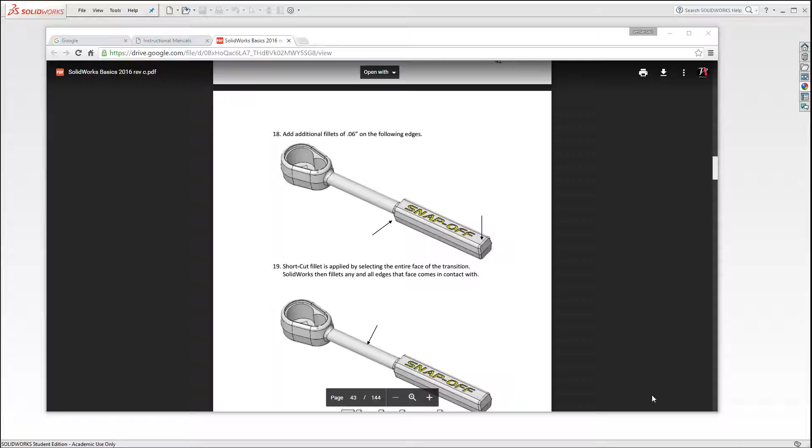In this exercise, we're going to take a look at the functionality inside SolidWorks 2016 with regards to creating this ratchet body that you see here. So let's begin.

First of all, we're going to build the head of the ratchet, then the transition section, and finally the handle. I'm going to start off with a new part file.

I'm in IPS, for inch pound second. Also note at the bottom, if you ever need to change the units, you can change it right here, and edit document units brings you there automatically. Very similar to just going up to tools, options, and setting what you need there.

Okay, I'm going to go ahead and select the front plane and start a sketch. I'm going to take the center line tool, hit the little arrow to the right of the line tool, find center line, and lock into the origin. When you get the orange dot, click and drag out a vertical line about an inch and a half or 2 inches, and then hit escape.

Now take the line tool and glide up just to the left of the origin. Take careful note where my pointer is currently, right about there. Click and drag like a 1-inch line at a slight angle to the upper left, as you see what I have. Click and then hit escape.

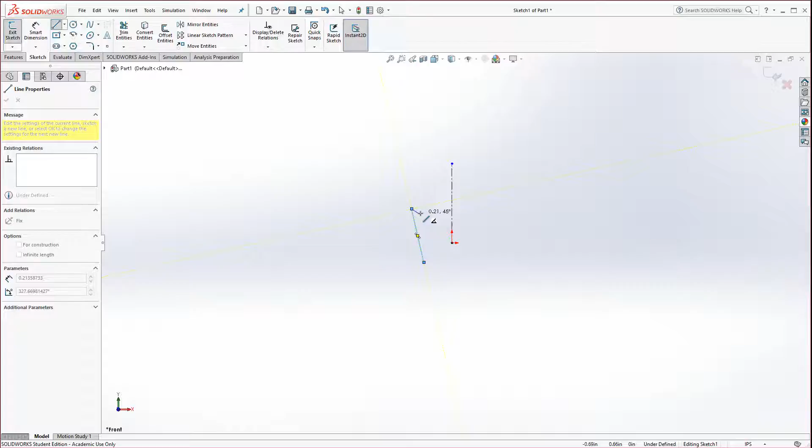Now we're going to look at the mirror tool. There's a couple things you could do with mirror entities. You could actually just click and drag a fence to surround both entities. In this case, there's only one center line, so it makes it very easy for SolidWorks to just go ahead and mirror this. And you can see it mirrored it over.

Now, rather than what some strategies are with new users, where they draw circles as an example - what not to do is where people draw circles like this, and then they go ahead and draw the lines and trim, and that's just a lot of work. Don't bother doing it that way. Here you could draw this without even using the trim tool in most cases.

So over here in the upper left, we go to the arc tools, hit the little arrow to the right of the arc tools, and you're looking for tangent arc. Tangent arc automatically makes a tangent off of one point. Go ahead and click and drag it over the top and drag it to the other point.

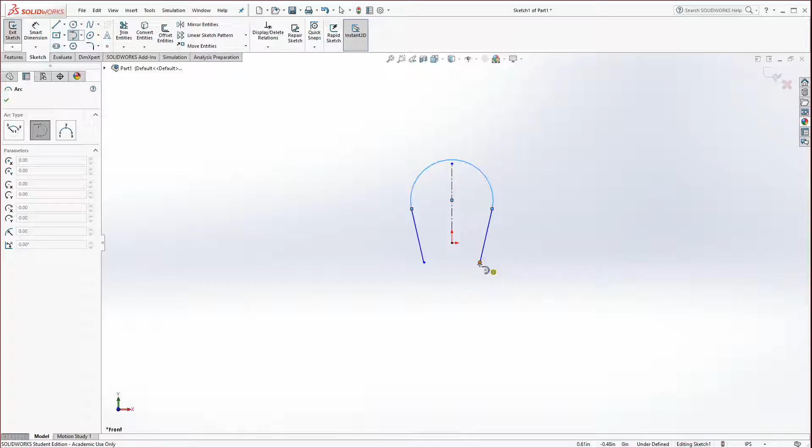Click. Go ahead and do the same here. Click on the bottom vertex, drag it to the other one, and kind of loop around versus go straight across, because sometimes that might transition to a different type of arc. But there we have our arc.

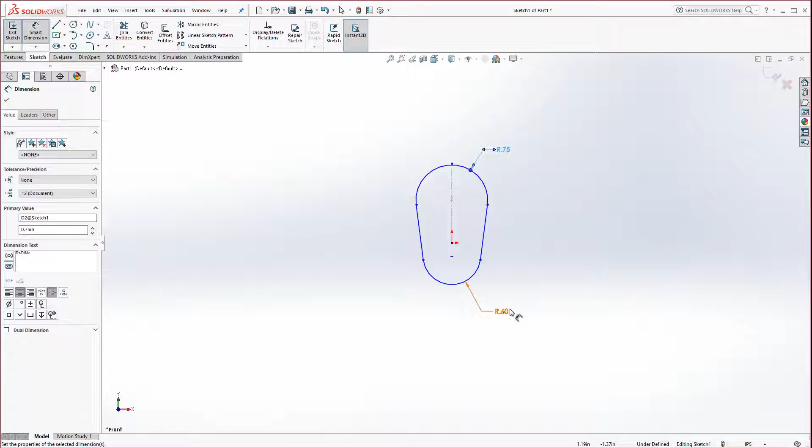Now we could go to the Smart Dimension tool and select the arc and dimension the bottom at 0.6 and the top at 0.75. Now you might notice that I'm at 2 decimal places. This is where we could use our IPS button and edit document units, and then specify 3 decimal places and hit OK.

All right, I'm going to go ahead and put one more dimension in. I'm going to dimension between the centers of the arcs. Now, sometimes it's difficult to see the centers if you're not looking carefully, so it's easier to select the arc itself - click on this arc at the bottom, click on this arc at the top. It automatically defaults to the centers.

Move your pointer to the right and center the dimension, and just make that 0.75. Now you could hit escape on your keyboard, and you'll notice that this center point is floating. It's not attached to the origin, and that's what we want to attach.

So there's a couple things you could do. First of all, you might want to zoom up - you could scroll and zoom up to it, or hit the F key for zoom to fit. Then to get this, if it's overlapping the line, it's drawn way up here - grab this bottom arc and, with the left mouse button depressed, drag it down and up, and you'll see it will move freely.

Then once it's moved away, you could go ahead and grab that center point and drag it far and away. Note that if it's really close to the origin and you try to drag it, it doesn't move. Again, the technology really wants you to drag it far distances and drag it back - it'll snap a little bit easier than it normally would. Okay, you'll see it becomes fully defined.

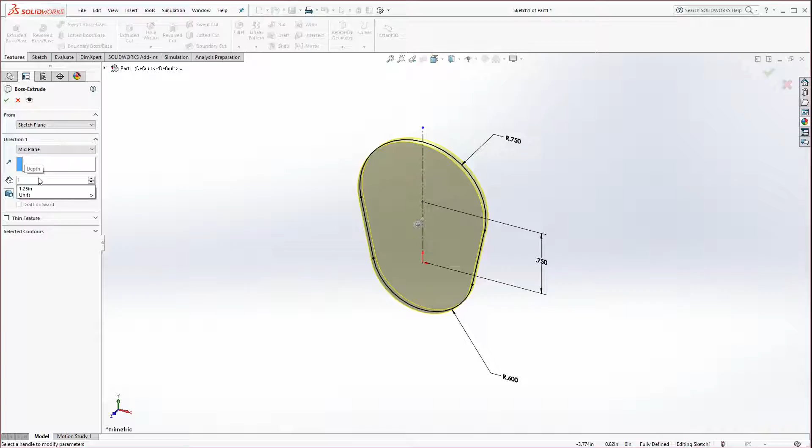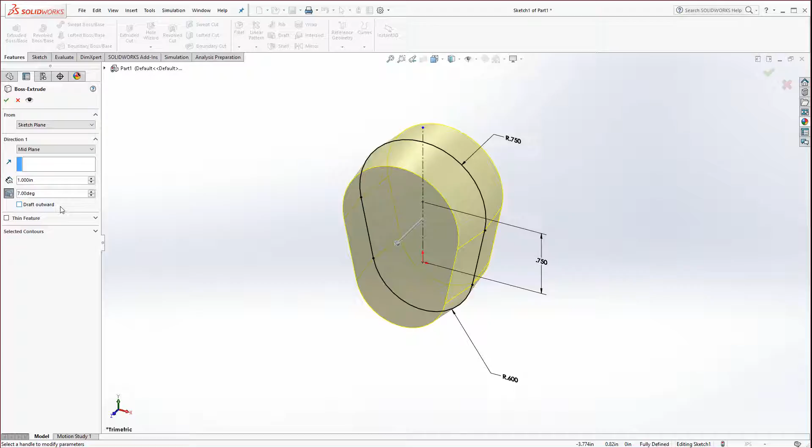Don't forget to click on the draft on/off button on the left. Click on that and set it to 7 degrees. Note there is a draft outward switch. I don't want you to use that right now, because if you set that, look at what you get—you don't want that. Make sure draft outward is disabled; it should not be checked. Hit the green check mark.

Let's put a recess in here for a cover plate. Select this face and start a sketch. You can do this in isometric view, or if you prefer, hit your space bar and go normal. While this face is selected, let's use the Offset Entities tool.

This is a tool we have not yet used through the other chapters, so it's a very good tool to learn. Offset Entities selects the edges of the geometry you've selected, like in this case the faces, but you can select edges or other sketches too, to offset them.

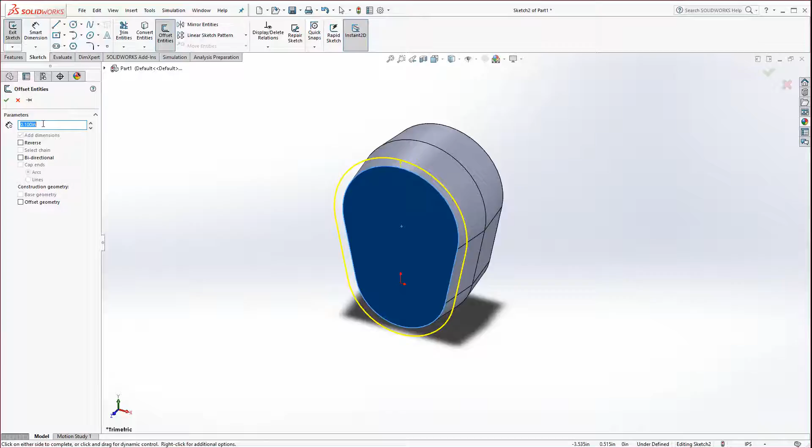Here you see a preview, offsetting outward. It actually needs to be offset by 0.125. Then check the reverse box—make sure there's a check in there. Sometimes you click on it and it just activates the box; the second click actually stays and checks it in.

Hit the green check mark. You can see this dimension of 0.125. If you double click on it, you could change it if you wanted to—it always remains there. Now we just go to Features, Extruded Cut.

Make sure you select Extruded Cut to remove the material—do not select Extruded Boss Base. Extruded Cut: put in 0.125 for the recess and hit the green check mark. We will not be adding draft on this, as it's a machine feature technically.

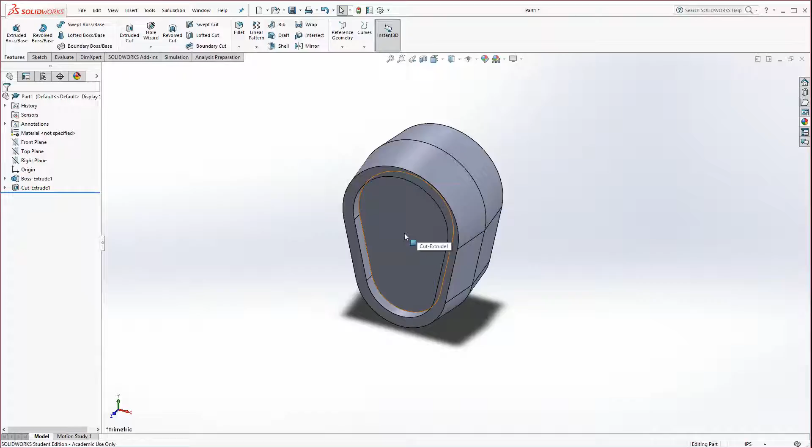Now we could go ahead and select the floor of that recess. Select this face and start a sketch. This one might be easier done if we hit the space bar and click on the front face, or click on front, or normal to—any of the above.

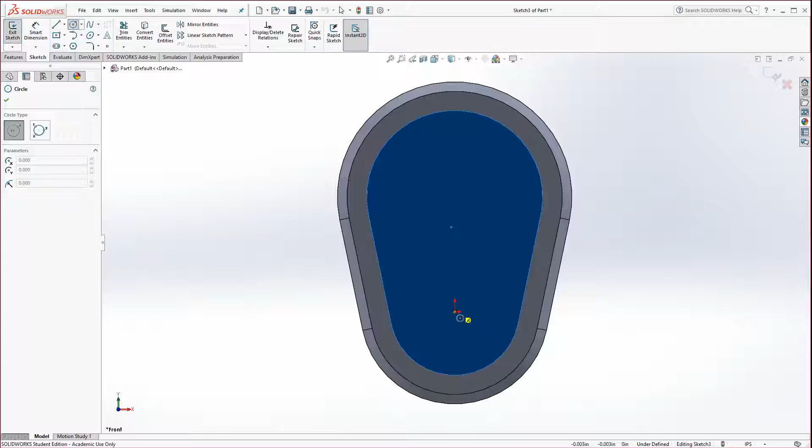Let's go to the circle tool. From the origin, it's very easy to find the center of this arc. Draw out an arc about 0.3, maybe 0.325-ish, around there.

Now for this one, it's not so easy to find the center, so here's a little trick: move the pointer to the edge of the arc where you want to find the center. This works every time. Once it highlights—I haven't clicked yet, be aware I did not click—you'll see the center point wake up, and now you can just move your pointer over there and click and drag out your circle.

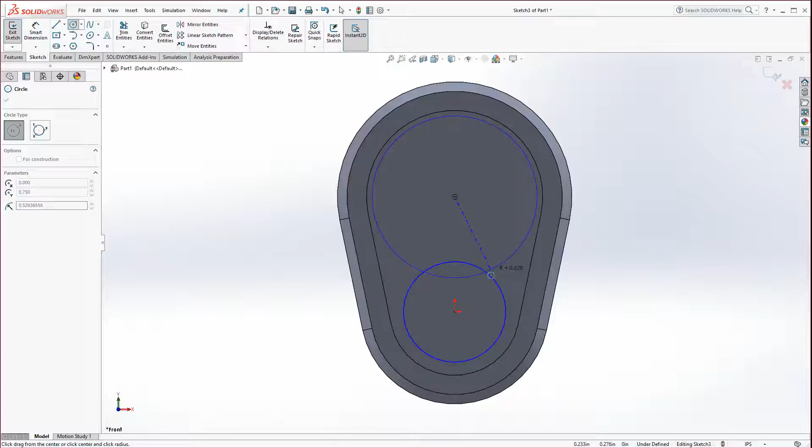Intersect the two—don't get them tangent to each other like this, you don't want that. Intersect them so they're just slightly intersecting, like that, so you get the little football shape in between.

Now let's go ahead and go to Trim Entities. There are several different types of trim; in this case, power trim or trim to closest. Let's try trim to closest first—just click on what you don't want. In this case, that bottom part of the little football shape, the area in there—click on it.

You'll see it disappears. If you want, try a power trim—it's a little different. You just move your pointer through the region you want to erase, kind of like you're erasing with a dry eraser, clicking and dragging through where the eraser would path, and it removes that geometry in between.

I'm going to lighten my screen up a little bit. If I hit this little arrow, you'll see there are different types of floors and things like that—plain white brightens it up, easier to see. Hit the green check mark in the upper left.

Okay, now from here I could go to Smart Dimension and put the dimensions in. Now in this case, I'm getting a radial dimension. As you might remember from earlier exercises, SolidWorks, if it doesn't detect a full circle, gives you a radius. So if you want to convert that, because that's important, especially if it's going to go out in the shop and be machined, so they can pick the proper size reamer. They might be working very quickly, so you might want to give them a diameter solution instead.

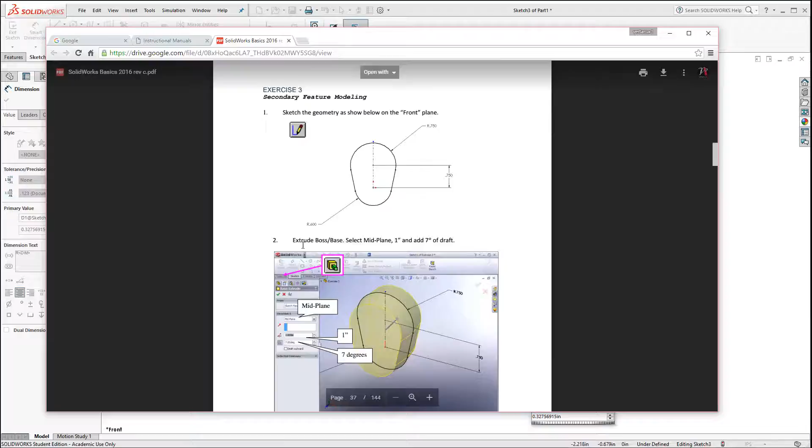So what you have the ability to do here is, in this case, you can see it's 0.35 and 0.5. Let me first change this to 0.35, and then I'll dimension this at 0.5, and then I'll show you what you could do. When they're selected like this, you could go over to Leaders, and right here you have diameter. Try that with the 0.35. Click on that.

Okay, and I'm going to hit escape. One click, it's actually in a mode where it's... there we go. I wanted to get the properties up there. You could either right click as well to do this. Here, there we go, go to Leaders and diameter. You could also right click, and there's options in there.

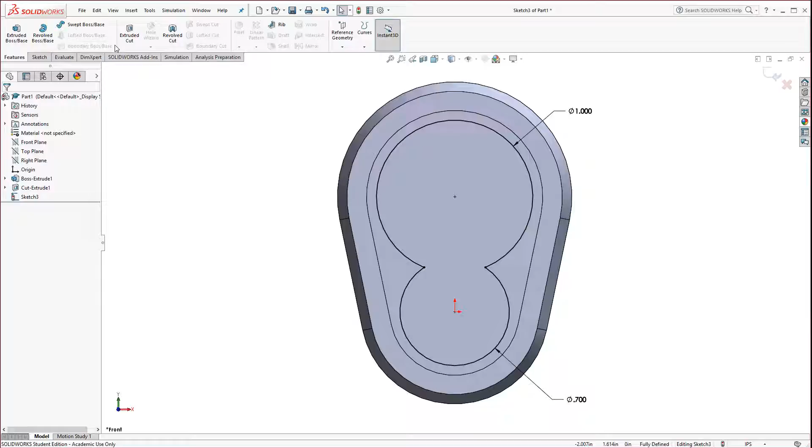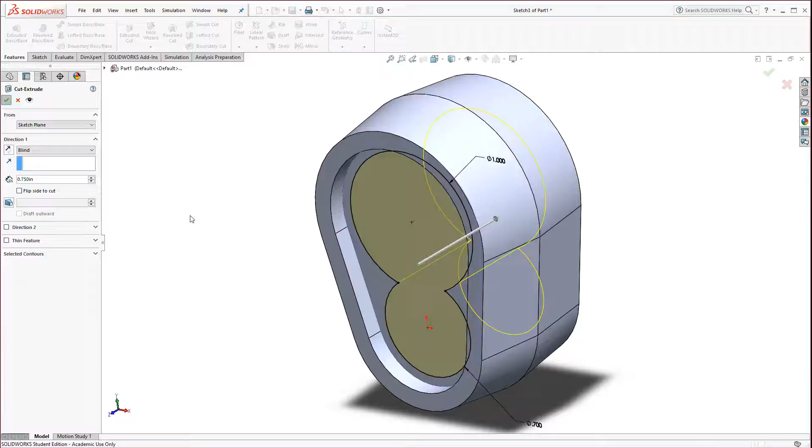Okay, so now go to Features and Extruded Cut, and we're going to cut this pocket. Let's take a look at the manual here, the depth of 0.75. So go ahead and type in 0.75 and hit the green check. Again, it's cut extrude. If you don't have it in cut extrude, cancel it, go to cut extrude. Otherwise, you're just going to build material on top of material.

It'll just... okay, let's go ahead and select the floor of that pocket and start a sketch. Again, normal to might be a good option, or click on the front plane after you hit the space bar. And let's put 2 circles in. Or we'll just put 1 in actually. Click and at the center, drag out your circle and dimension it. Okay, in this case, it's going to be, let me just check my... 0.375.

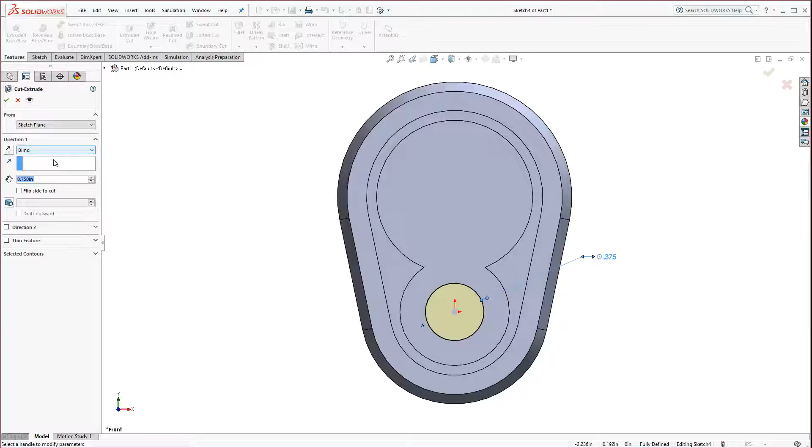Okay, now I'm going to go ahead and cut this. I'm going to go to Extrude Cut and select Through All. Okay, so now I have that there.

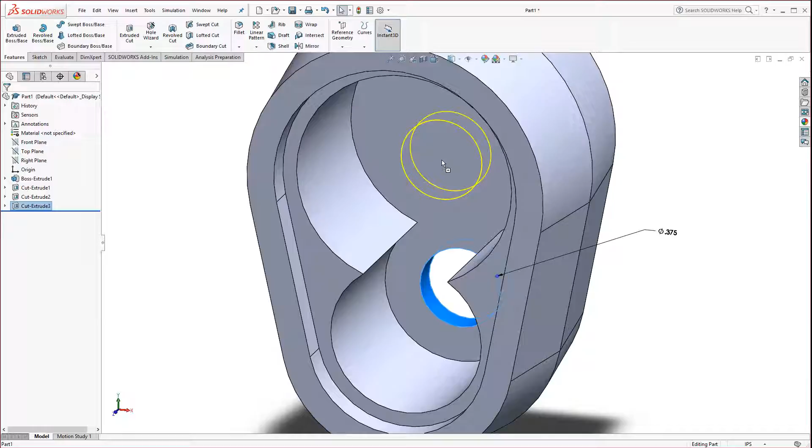Now what I can do, if I hold the Control key, I could drag off an additional copy. Actually, I'll do it from the feature tree here. I'm going to hold Control and drag this right onto that surface. So I'm holding Control and the left mouse button, both depressed at the same time. Control is the one you want to click on first and hold it, and then you could go ahead and drag it from the feature tree. Release the mouse button first, and then you can release Control.

And it's going to tell you there are external relations. Do you want to delete them or leave them dangling? The external relation it's referring to is most likely the center point that was locked into the center of the arc below. If you leave it dangling, you could reattach it. It gives you a little red block.

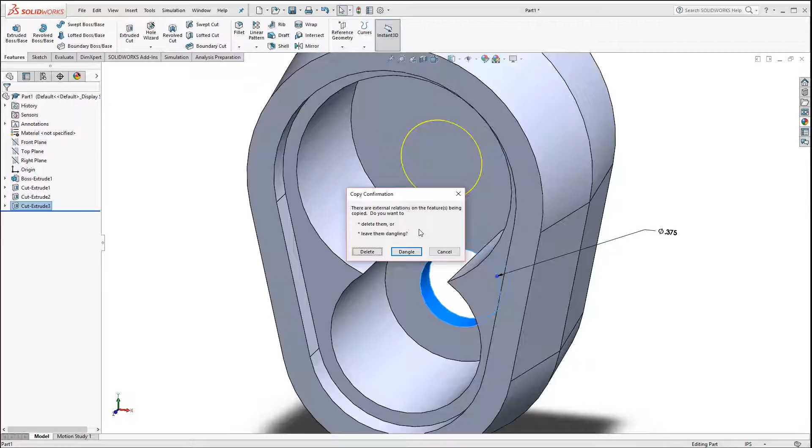I'm just going to hit delete, and then I want to show you how to edit that. So you can see clearly, as you rotate it, it's not centered. So what I want to do is right click on that cut extrude in the feature tree, that cut extrude 4, and you'll see edit sketch. Click on that. Now here you could grab the center with the left mouse button and drag it around. What you could do to wake that up again, just like we learned earlier, drag it to an edge. Don't release it yet, just wake up that center point. Now you could drag it back, release it, and hit the rebuild button at the top. Rebuild regenerates the model with the changes made.

And there it is. Okay, let's go ahead and put the fillets on. Go to the fillet tool and set it to 0.1, and select this edge and this edge. Hit the green check.

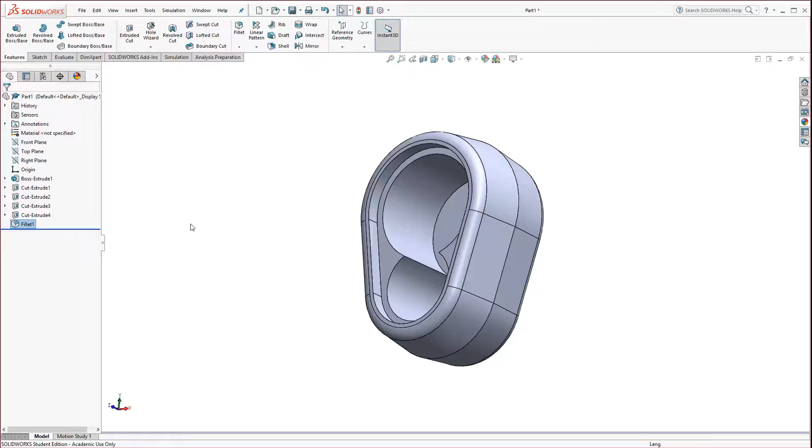Now what we're going to do is make the transition section. Go to the top plane and click once, but don't start a sketch. Instead, I'd like to show you how to offset a plane and make a new one off of it.

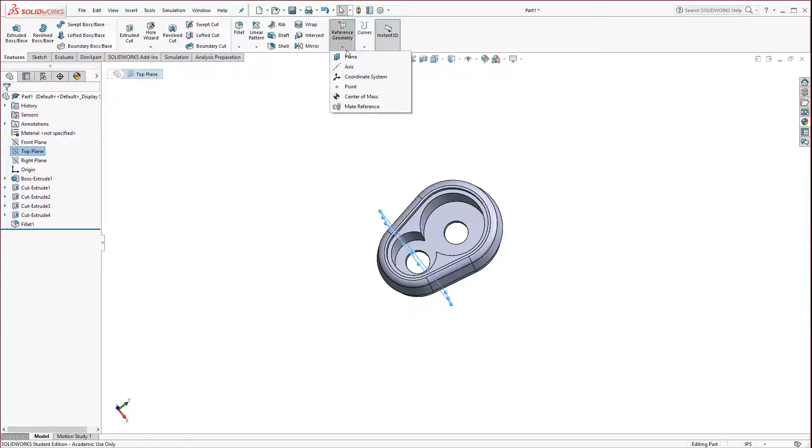The top plane is centered, and that's a great place to draw a sketch, but unfortunately it's in the center of the model. We want that offset the length of the transition section, which is 4 inches. With that selected, go to the reference geometry button, click the little arrow, and find plane. It'll take a minute, but then a little arrow and a plane will pop up.

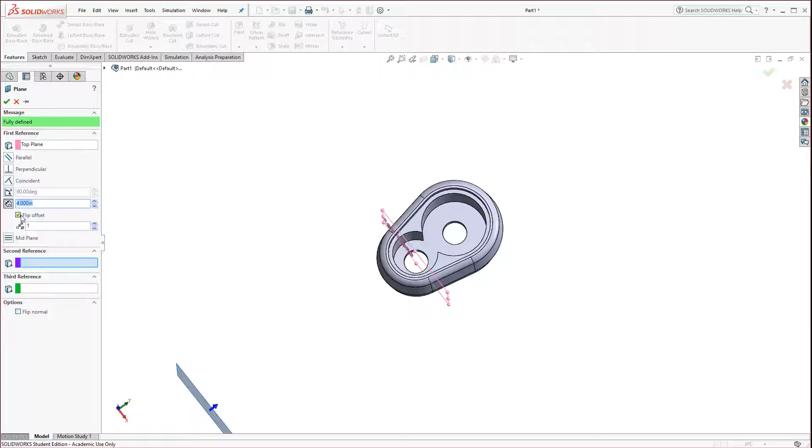Now you could either drag this, grab the little arrowhead and drag it - I'm having a little tough time getting that to work. That's okay, I'm going to type in 4 for 4 inches and flip the offset. Check the little box, flip offset, and if you zoom out you should be able to see it's down below. Hit the green check mark.

Now you can select that edge of that new plane you just created and start a sketch. You could draw an isometric if you want, maybe zoom up to it, or go normal to. Either one's fine. Click on circle, and at the origin - that origin is a projection of the original origin in the center of the model - so as long as you centered everything, you're in good shape.

Click and drag a circle out, and now just go to Smart Dimension and dimension that circle at a half inch, so 0.5.

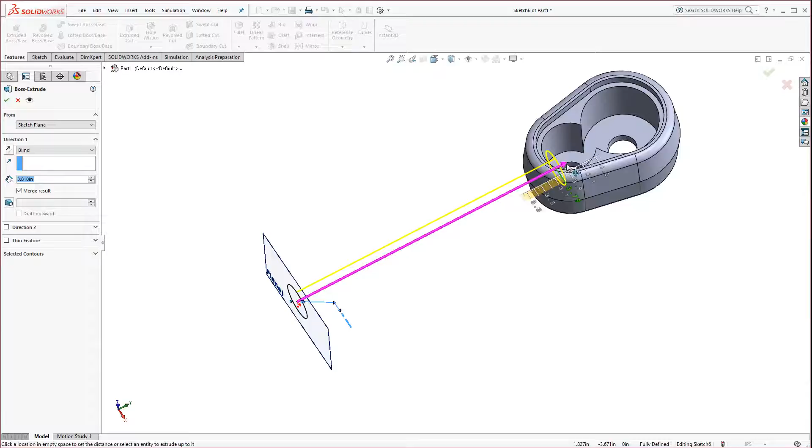Now we could go ahead and go to Features, Extruded Boss/Base. If we were to go in here, we might have a little bit of a tough time finding exactly where that stops without intersecting the model like we see here.

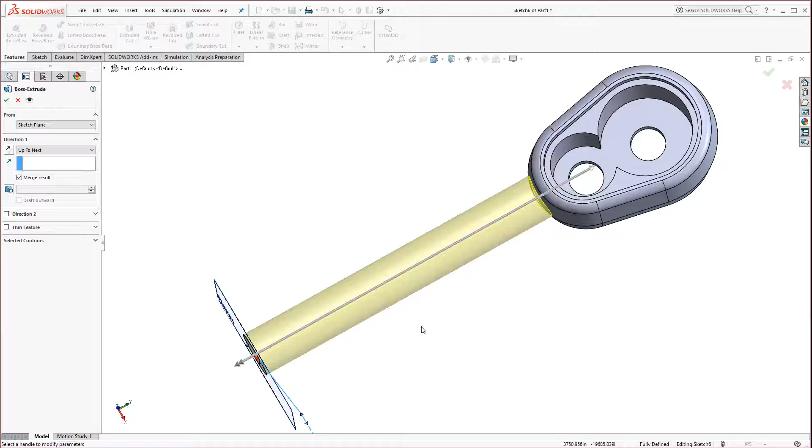Instead of just going with blind, try selecting up to next. Now if up to next isn't available, that typically means your extrusion's in the wrong direction. But if it's available, that means you're pretty good to go, and you could go ahead and select it. It will go up to the next body and intersect with it, combining the two. Go ahead and hit the green check mark.

Now you could hide that plane. Any plane you could hide or show, you just right click on it, and there's a little eyeball with a line through it. Click on that, and that will hide it.

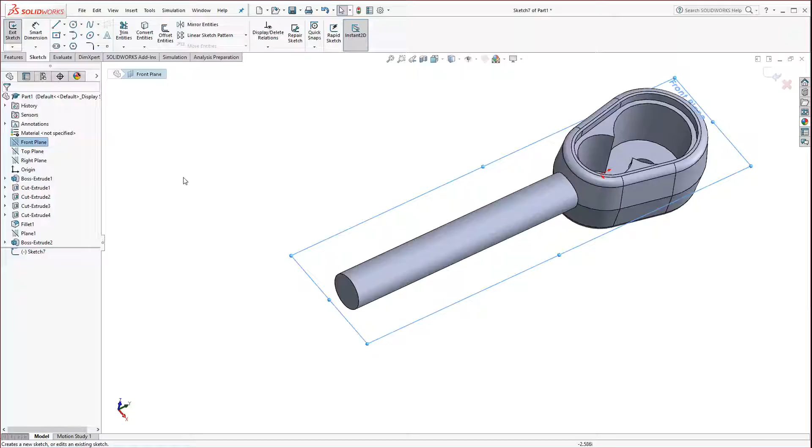Now select the front plane and start a sketch. Hit your space bar and go normal to the front, or you could go normal to. Either one is fine.

Now I'm going to zoom out a little bit because we need to make the handle section. On the handle section, I'm going to show you a little trick here. There's a dozen ways to do this - this is just one, it's a modeling technique.

Go to corner rectangle, and over here on the right, just drag out a rectangle. Don't worry too much about the size. Let's go ahead and add smart dimensions to it - don't select the points. Okay, it should be 4 inches by 1 inch.

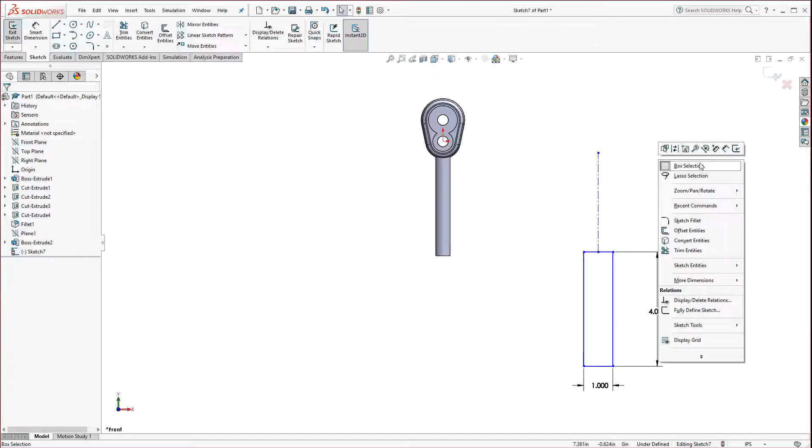Now go to the center line tool. Hit the little arrow to the right of line, find center line, lock into that middle, drag out a center line, hit escape. And if you right click, remember you could go to a quick launch of smart dimension, or you could go back to smart dimension up there.

Dimension this at 3.75. The reason why I'm making it 3.75 is because we're going to add draft on it. If you made it 4, it would be sitting on the outside and only a little sliver would be contacting that surface, intersecting the two. So we need to dig it in a little bit.

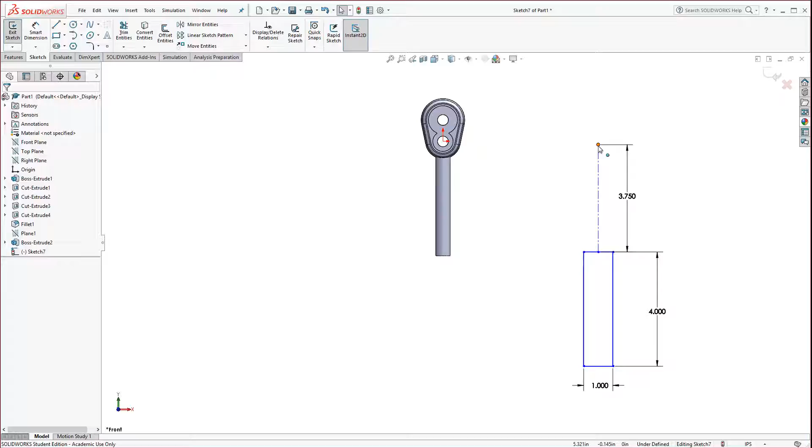Hit the green check mark, and now here's what you do. Hit escape a couple times, make sure nothing's selected. Grab this top vertex, hold the left mouse button down and drag it to the red origin. When it snaps to it with the blue dot, release it, and it's fully defined and locked in position.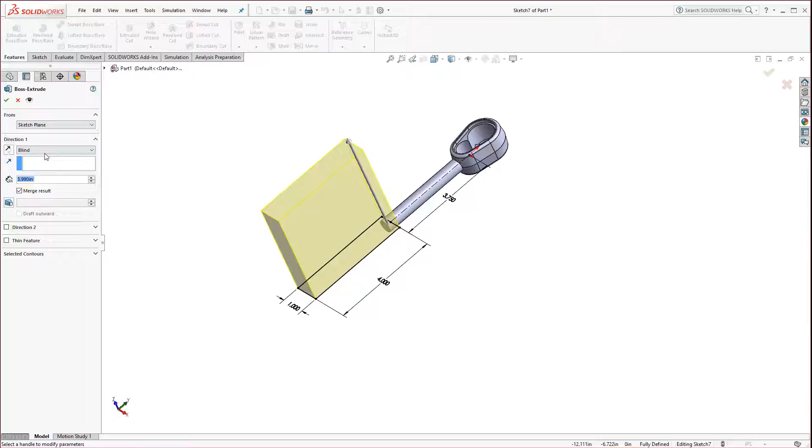And it's centered. Now let's go to Features, Extrude Boss Base, and again, instead of blind, select mid plane. It's only going to go 3/4 of an inch, so 0.75, and turn on the draft tool. It should remember the 7 degrees of draft, and that's good. Hit the green check mark.

Now let's put some fillets on that handle. Go to the fillet tool, and again, the 0.1 fillet is fine. Select the 4 edges, excluding this one right here, because that's the parting line. If you want, you could fillet it, I guess it doesn't really matter. And hit the green check mark.

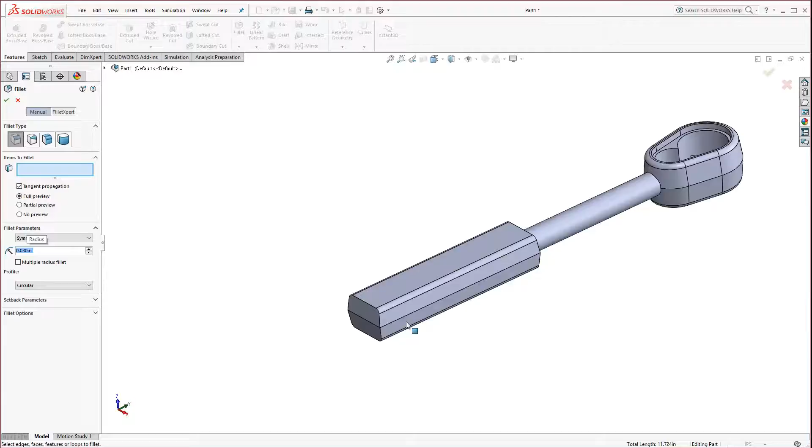Now go to the fillet tool and make a smaller fillet, 0.03. Select this edge and this bottom edge. Notice it doesn't follow through all the way around because I didn't fillet this edge, and tangent propagation means that it has to have a radius to continue around the track. In this case, as a sharp edge, it stops. So you have to select those edges.

And finally, go ahead and select right in the middle of the surface. This is one of the benefits - not all CAD systems do this, but you can select that surface and it will fillet all of those edges of that surface. Go ahead and hit the green check mark.

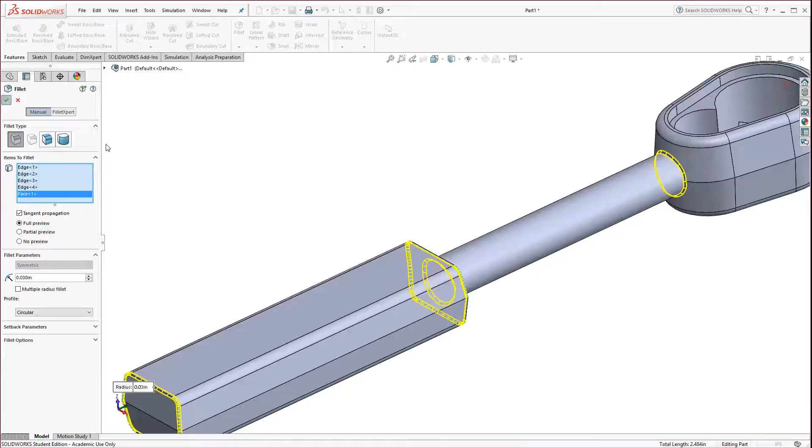Okay, make sure you save this as E3.

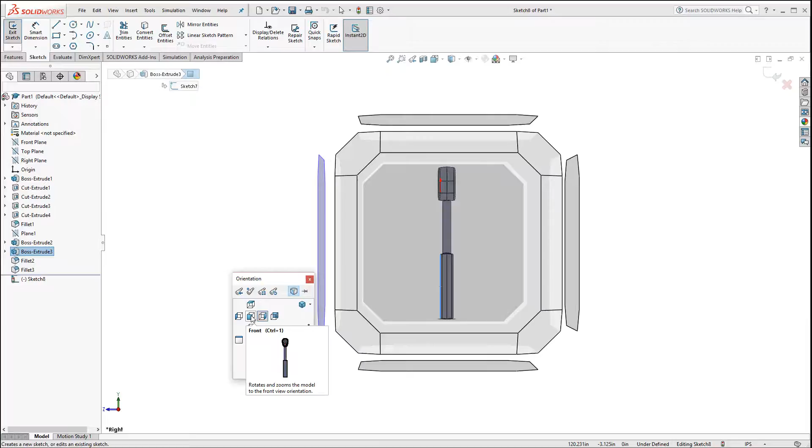Let's move on to engraving some text on here. Select your face on that handle, start a sketch, and go to the right view orientation - oh, I'm sorry, front. Now, holding your Alt key on your keyboard, the Alt key is right next to the space bar.

Hit your left arrow key 1, 2, 3, 4, 5, 6 times. That's just a quick shortcut key. Alt and the arrow keys rotates clockwise or counterclockwise. Now you could zoom up to that area right there.

Just scroll and point. Okay, the first thing we're going to do is we're going to go with the centerline tool up here. We don't want our text - SolidWorks does not center the text from the center of the actual font. It's from the base, so we need to draw a line across, just like you would if you were drafting in the old days on a board.

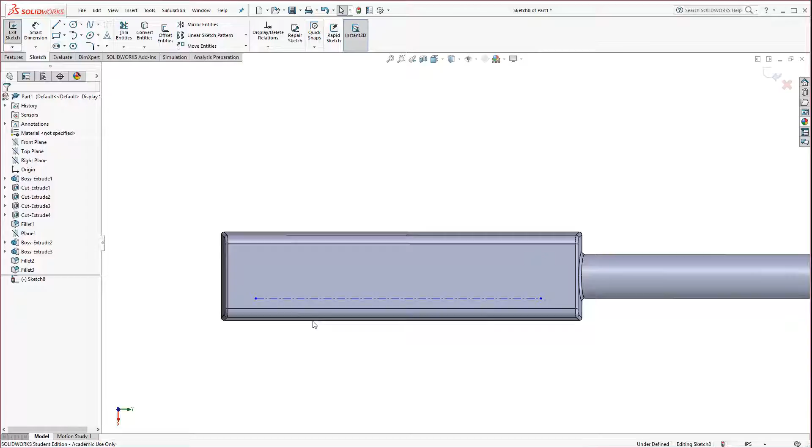Draw a little line. Notice it's offset a little bit. It's not in the center. It's not at the bottom edge. And then over here, just get a position where you like it, because your text is going to be scribbled on there.

Okay, now when that's done, select that edge after you hit escape. Select the actual line and go to the A button up here, which is text. Now the text is going to follow that curve, that line that you just drew.

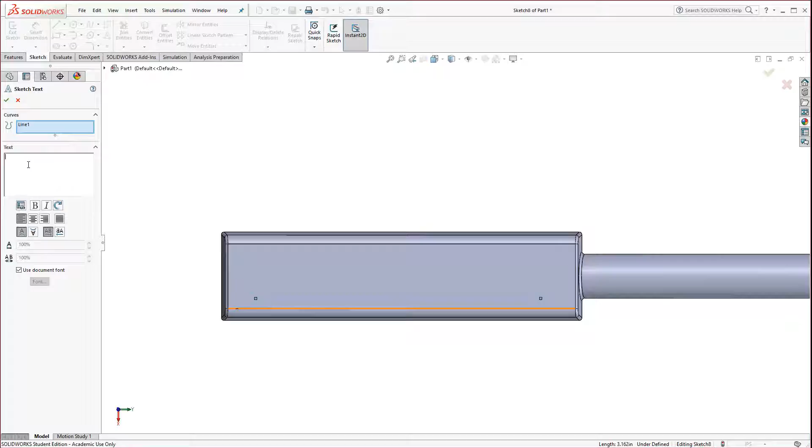And so I'm going to go ahead and type in SolidWorks. You'll notice that it's justified to the left, just as it shows here, left align. You could center it, you could justify it to the right, or you could spread it out. Now I'm going to go to choose whichever one you prefer. If you're making it inverted for like a mold or something, note that you can flip vertically and backwards.

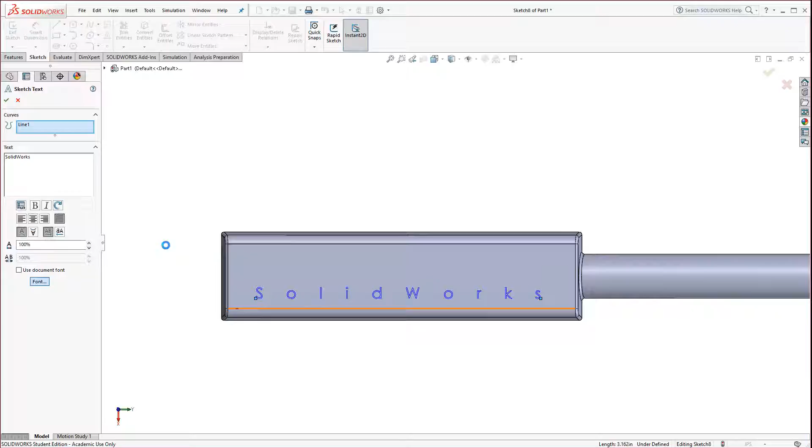All right, turn off Use Document Font, this little checkbox, and go to the Font button underneath. You'll see that you could choose virtually any OpenType or TrueType font. It will take from all your fonts directory, so you might not have the same fonts that I do, just be aware of that. But you could go in and you could select one that you like.

The curly ones don't always work well, so stick with something that's bold typically, but don't use the bold over here. The oblique is fine, but the bold has some issues. What happens is that it spreads it out, and then unfortunately sometimes intersecting geometry occurs, and thus it's no longer like a watertight solid condition. It can't cut it. Alright, so I picked one here.

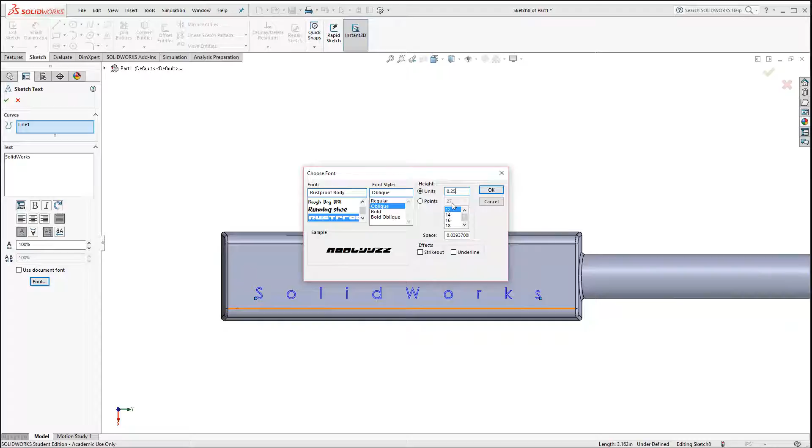I'm going to go with oblique. Remember, don't go with the bolds, those usually screw it up more than anything. Okay, now as far as the points, you can set it to points, or in this case I want it to be 1/4 of an inch. And if you click on oblique again, it resets it so you can kind of see a preview.

And hit OK. Now in this case, it's just too big, it won't fit. So I'm going to have to go to Font again and choose something a little bit less wide. Let's see here.

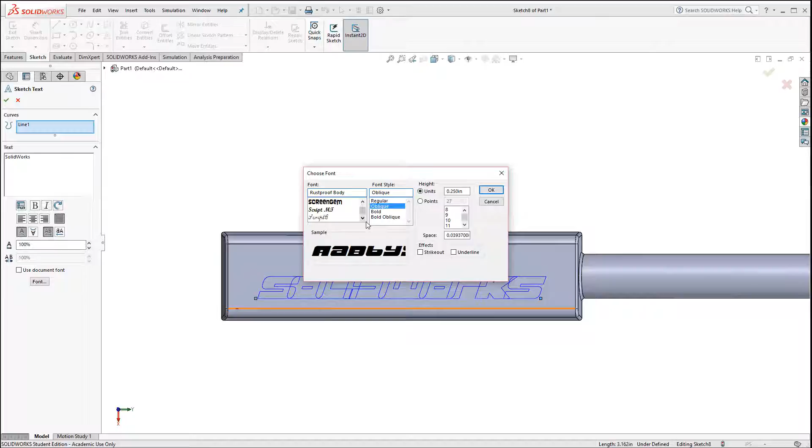The scripts don't work very well all the time, and if you do a script, be aware that you probably will need to change it a little bit. Okay, that one works pretty well. In fact, actually, I can make it a little bit bigger. I'm going to go with 0.375.

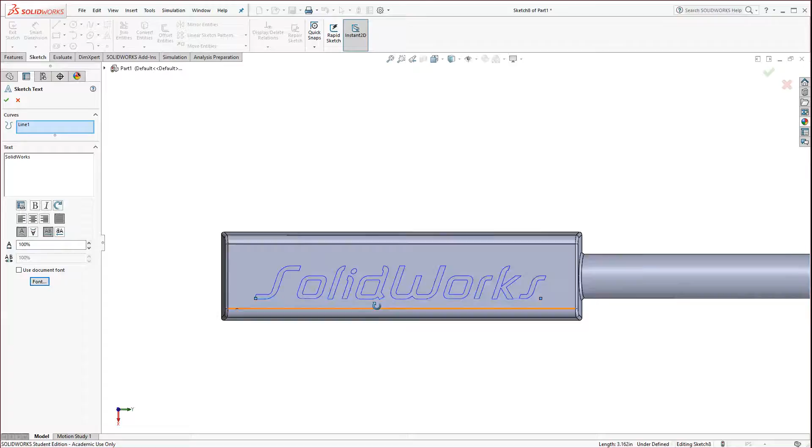Okay, now I'm going to go to Features. Actually, first hit the green check mark. And if you want to center it even more, you could, after you hit Escape, you could grab this and relocate it till you get it centered. Or you could use dimensional measurements to lock it in.

Now just go to, if you want an embossed, raised, select Extrude Boss. If you want an engraved, select Extrude Cut. I'll engrave it. And just set it to 0.02, so 20 thousandths deep. And hit the green check mark.

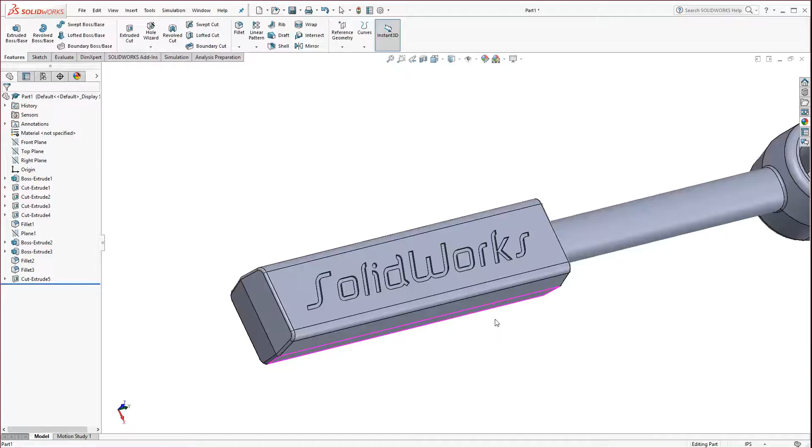And there you can see the engraved text. Alright, let's take a look at the bottom side.

Let's say we want to make little notches here for our knuckles, so we could grip it a little better. What I'm going to do is select the right plane from the feature tree and start a sketch.

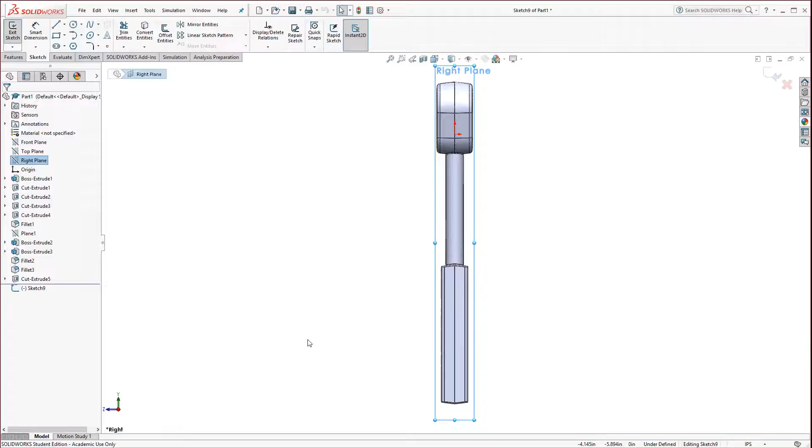I'm going to go Normal To, hit the space bar, go Normal To again. I'll hit my arrow key left to right just to see what's going on here. Okay, that looks good, I know which one is the bottom now. I hit the arrow key left once then back right once because I wanted to see where the text was. I know now I have to be on this right side.

So I'm going to take the circle tool and just position this like so.

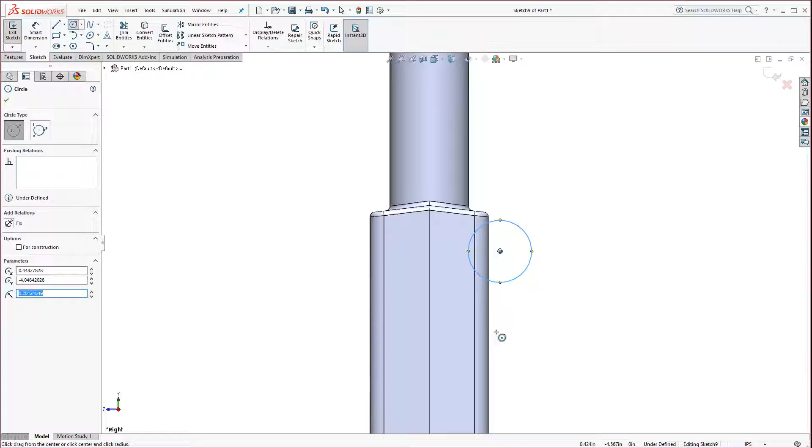I'm going to go to Smart Dimension and make it 0.4, and locate it center to this point at 0.25. Actually, I better make that 0.3.

Okay, one more dimension. Select this and go to the center of the model and dimension that at 0.45. Okay, now you can see we're in the center.

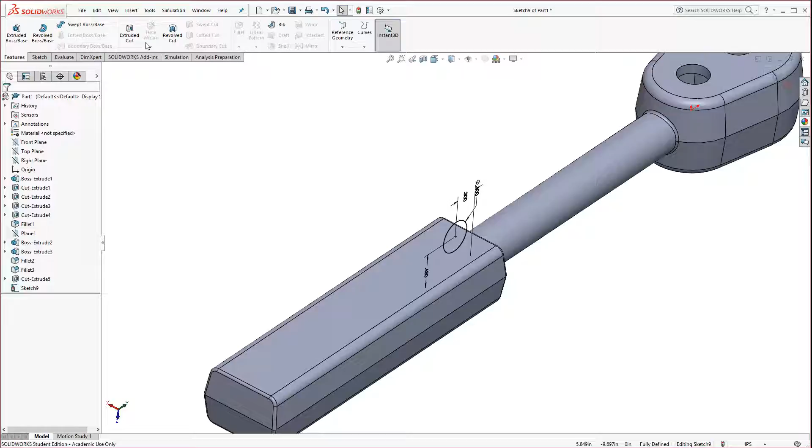So what we're going to do is go to Features, Extruded Cut. Oops, I selected Revolved Cut - sorry, Extruded Cut, there we go. And then you want Through All, both, and you could just hit the green check mark.

Okay, so we have our little scallop cutout. Go ahead and select that. Go to, now we're going to use the linear pattern tool. If you hit this little arrow, you'll see there's several ways to make patterns. We want linear pattern, select that.

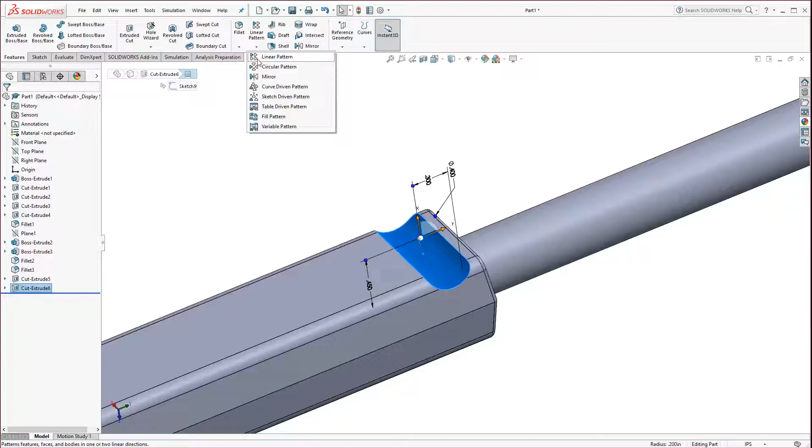The trick to a linear pattern is to select an edge in the direction you want it to travel. So like this edge right here would be perfect. Actually, for direction let's clear that out and select this edge instead. Direction 2 don't worry about, because we're only going in one direction.

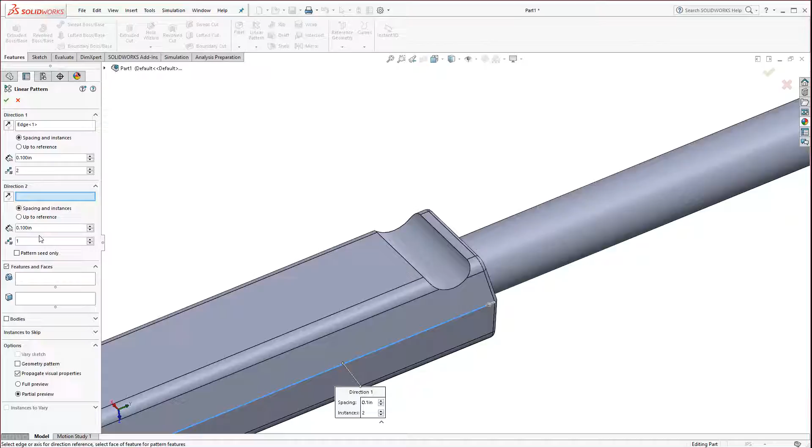Okay, and then for features and faces, select that little box and click on this. Now you can already see a pattern forming, and right here you could adjust it by bumping this little arrowhead up until you get it where you like it.

So let's say we want it positioned a half inch away from each other, and over here this is the number of instances including the one you started with. So you have the ability to tinker with that a little bit. Then hit the green check mark, and there's our cutouts.

Now you can fillet those too. Just go to the fillet tool, we'll go with 0.02, and then you could just select the faces. We could pattern this as well, but it's just good practice to fillet.

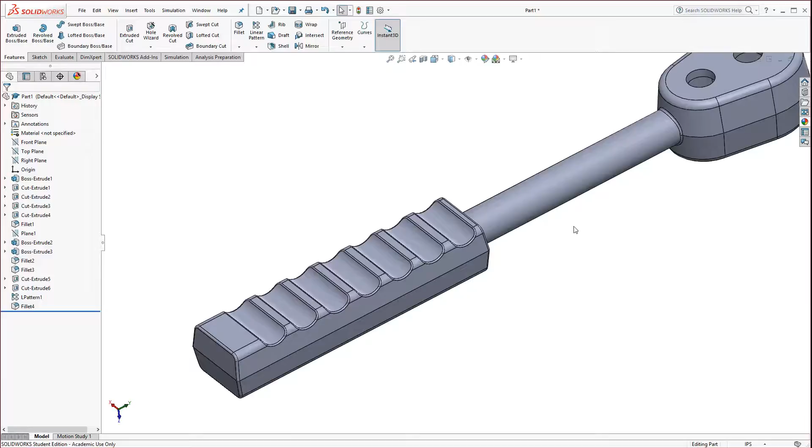And that concludes this exercise. The labs associated with it, you're welcome to try on your own. If you want, stay on this video and I will go through them in just about a second here. Otherwise you could pause and try them on your own and watch later, whichever one you want to do. Okay, let's get started.

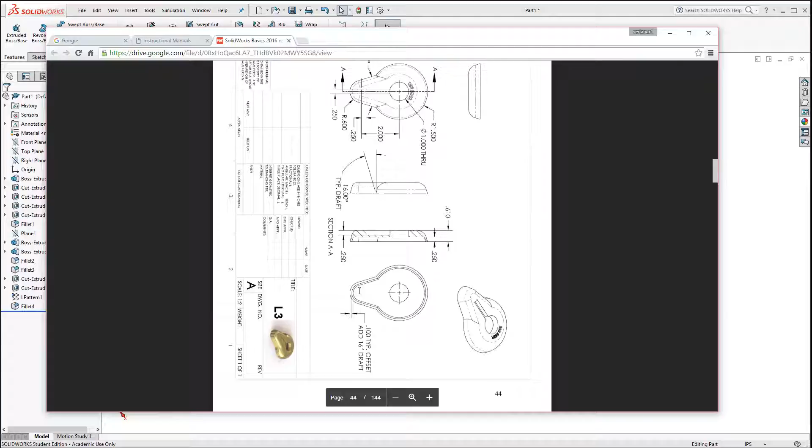The first lab, on page 44, looks like a key cover. Believe it or not, this encompasses almost everything we learned today. So what we're going to do is make this. I'm going to start with a new part file.

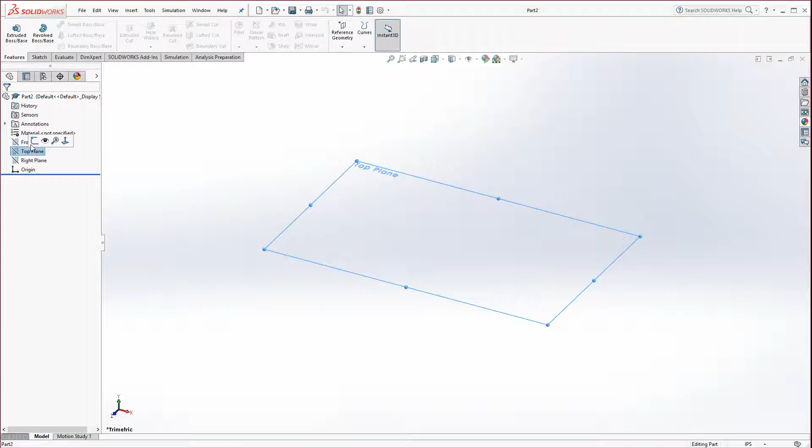I'll do this on the top plane. I'll start a sketch, and I'm going to draw, just like we started off with, a center line. Whenever anything's symmetric, always think center lines - they're very useful. Draw that little line at this angle, select the whole group and mirror it over. So really this is just a rehash of what we did earlier.

Now you could go to tangent arc, click on this corner to this corner. Be careful, tangent arc - you don't want the top to be tangent, this is a little different, it's going to look a bit bigger. So what I'd recommend is actually using the 3-point arc. Click and drag clear across to click here, 3-point arc, that's the way it works. Make it really big and click like that.

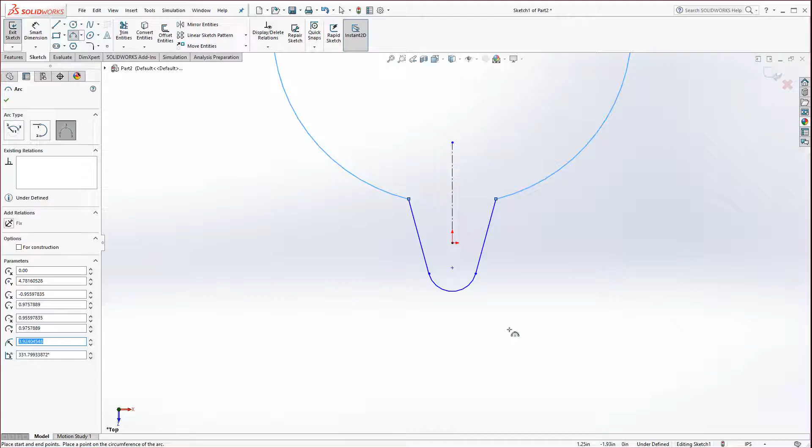Okay, now we're going to go ahead and add some dimensions to this. So this bottom dimension here, let's look at the print - it's 0.6, and the top is 1.5.

All right, now you can zoom back up to it and squeeze these dimensions in so you can see things a little bit better.

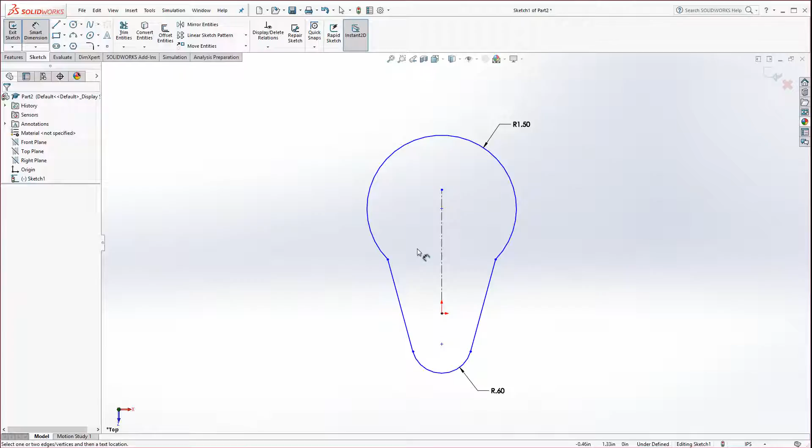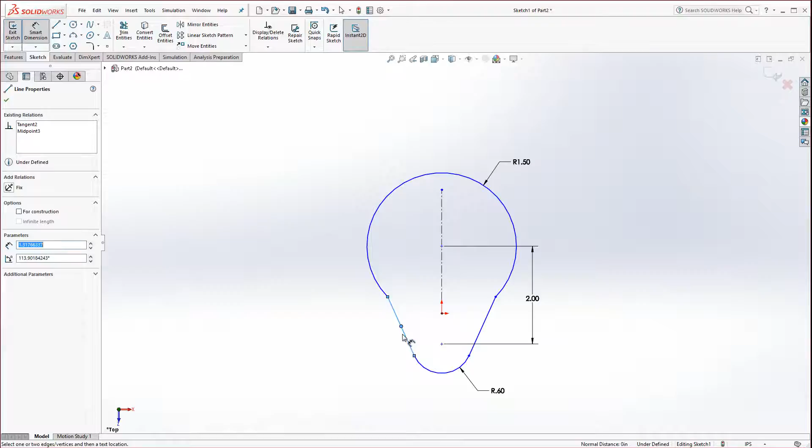Finally, the dimension here between the two is 2 inches, so dimension from arc to arc, 2. Then you have to put in an angle dimension. This goes back, this is 35 degrees from this. Oops, I didn't want that—hit escape if that happens to you. Go back to smart dimension. Don't get those center points by accident. Okay, and this is 35.

We could actually just position it now. I'm going to hit escape and grab the center point and drag it to the origin. When it snaps blue, you lock it in. If it turns black, you're in good shape.

Now we're going to extrude that. Go to Features, Extrude Boss, and that needs to be an extrusion depth of 0.61.

And there's draft on it, so let's take a look at the draft. The typical draft is 16 degrees. So over here, turn on your draft, type in 16, hit enter, and hit the green check mark.

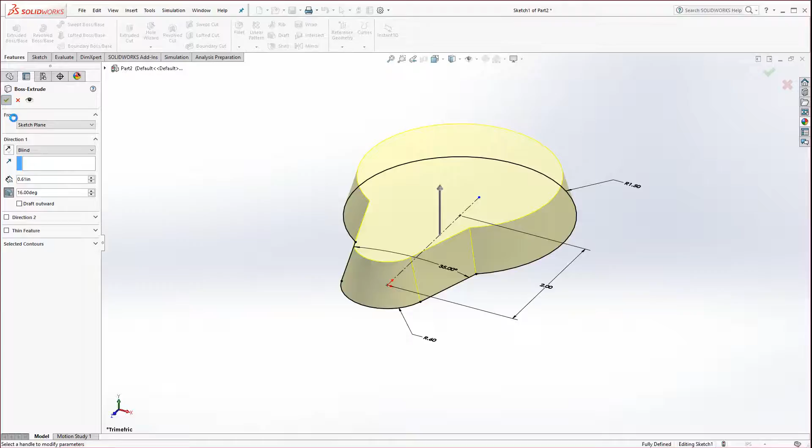Now there's 2 fillets that need to be added, a radius of a half inch and a radius of 0.25. Sometimes with filleting, order of operations is very important, just like mathematics, because behind the scenes it is mathematics, the underlying code.

Let's try our large one first, 0.5. Select this edge. When you don't see a full preview and you have full preview selected, that's not a good thing—that means it's probably going to fail. In fact, if I hit the green check mark, it gives me a warning, failed to create that fillet. Most likely it's due to this edge here highlighting. So hit close, and let's right click and clear that selection.

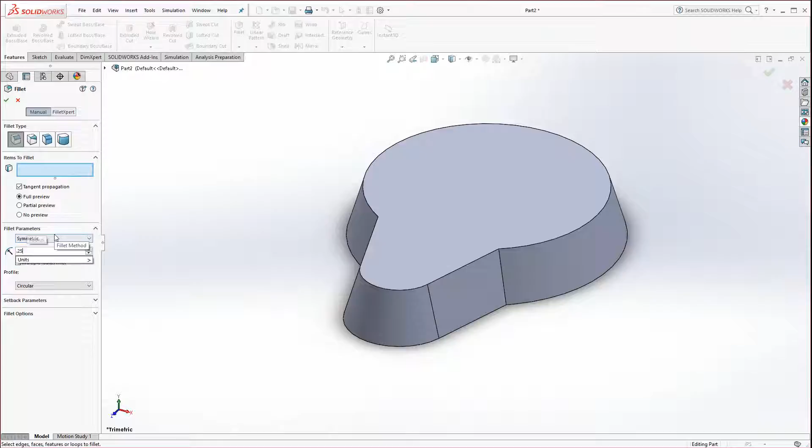Let's go with the smaller one of 0.25. Select this edge, then go to multiple radius fillet and select this edge. This one you could set differently to 0.5. And there it is.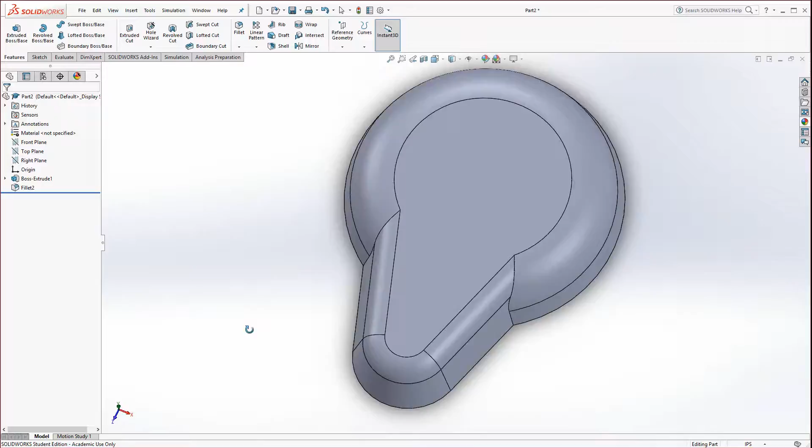All right, let's flip it around the back. Select this face, start a sketch, and use the offset entities. We will not use the shell tool on this one. The offset is 0.1, which is the default, so just hit reverse and the green check mark.

Go to Features, Extrude Cut, and this is supposed to be 0.25 deep for the cut, and it needs the same 16 degrees of draft inward. Hit the green check and apply.

Now the details in here. Select this face, start a sketch, go ahead and draw the through hole. Find the edge, wake it up just by moving over it, drag out your dimension, and let's double check what that is supposed to be. In this case it's 1 inch through and does not specify draft. Oops, not 0.1, 1.0. Okay, then go to Features, Extrude Cut, Through All.

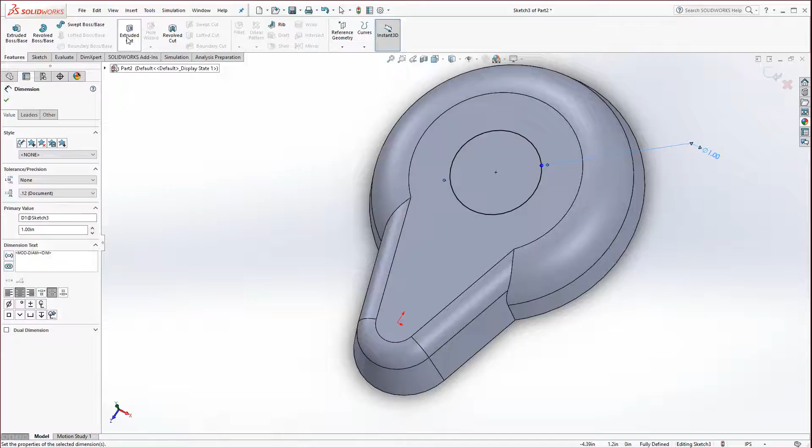And now the little keyway area. Select this face, start your sketch, and let's go Normal To. We will use that little trick I showed you earlier. Draw a little rectangle over here to the left. Go to the center line tool and draw a little center line at the bottom there.

Go to Smart Dimension. The width of this is supposed to be 0.25. The length of this little line—oops, I got that little endpoint again. Right click, boy it's really a problem today. 0.25. And then the overall length, you could just make this about 2 inches, because as long as it doesn't bleed into that, actually maybe 1.5.

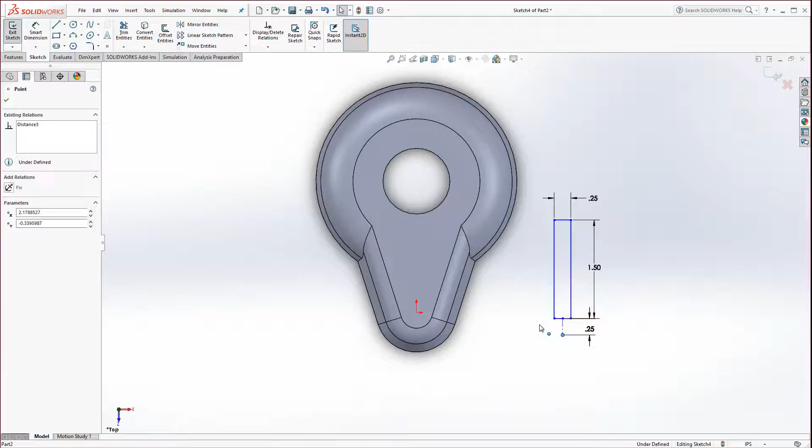Let's hit escape. Now just drag that over, drop it right there. We just don't want it to get too large where it overlaps into this and cuts that. If it's just cutting air here, we're in good shape. So you could go to Features, Extrude Cut, and it's only 0.25 for the depth, no draft.

Now as for the text, select this face, start a sketch, and go Normal To. Let's go ahead and we're going to use, not the circle, try using center point arc this time. Center point arc is a nice tool.

You just wake up the center of whatever you want to center to, click here, drag it around kind of like a rainbow. Let's see if we could wake that up. If you get it, you just keep going around until you get it to lock in like so.

Okay, one thing though, here's a trick: it has to be dashed or construction geometry. So over here on the left, while it's still selected, check the little box for construction. Hit escape. By the way, if you need to change it later, you could click on it anytime—there's the construction geometry, there it is too. So you could transform these anytime.

Drag this down a little bit and actually smart dimension it at 0.6. Then click on the arc and click on the 2 endpoints of the arc, and it should be 1.25.

And that's good enough for right now. It really doesn't matter too much on this, but I'm just partially constraining it.

All right, now go to the A text tool. The arc is selected. Go ahead and type in ECC EDU. And again, if you want to use a different document font, otherwise this one's fine. I'm just going to use this one and hit the green check.

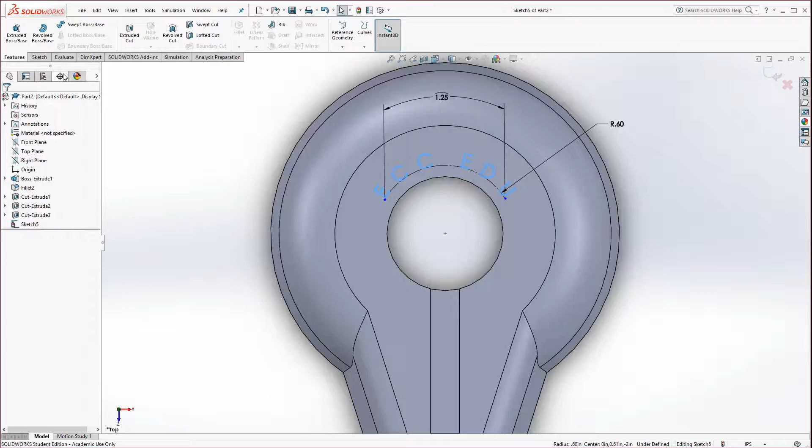And I'll go to Features, Extrude Cut, and 0.02 is a good one to go with. It's a very shallow depth.

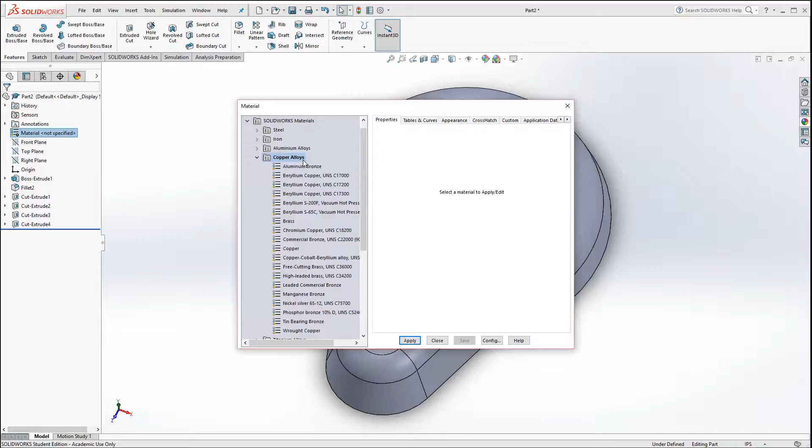All right, now finally, what I want to show you on this one, it calls out that it should be brass. So over here on materials, you could right click on it and go to edit materials, and instead of steel, hit the little arrow and find there's all different types of alloys and things like that in here. There under copper alloys, you'll find brass. Go ahead and select brass and hit apply and close, and you'll see it will take upon the properties of brass that you see there.

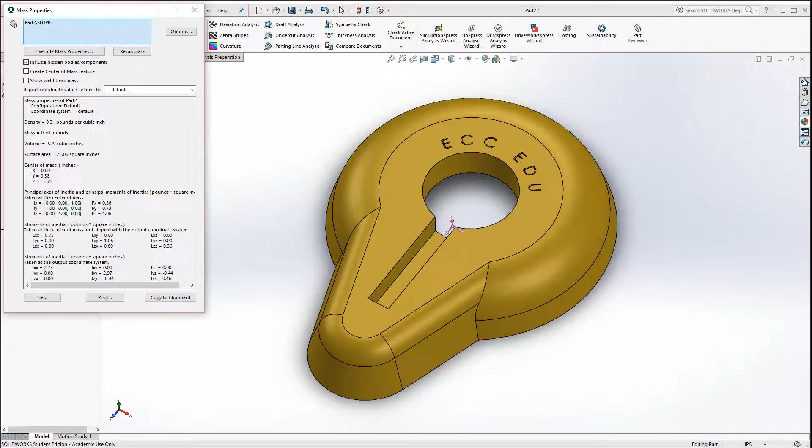And also the benefit to that, you could find out exactly how much it weighs at any time. If you go to the evaluate tab, you could go to mass properties, and it actually picks up the mass properties on that part. In this case, we're at 0.7 pounds of brass. So you could figure out how much that's going to cost.

Okay, moving on to the next lab. Save that as lab 3, and then now lab 3B. It's like a frisbee kind of deal, frisbee or hat.

Okay, and in this case, we'll start a new part file, and this is a review of last week's lesson, which was revolve features. Just select the front plane, start a sketch, take your centerline tool, and draw a vertical centerline.

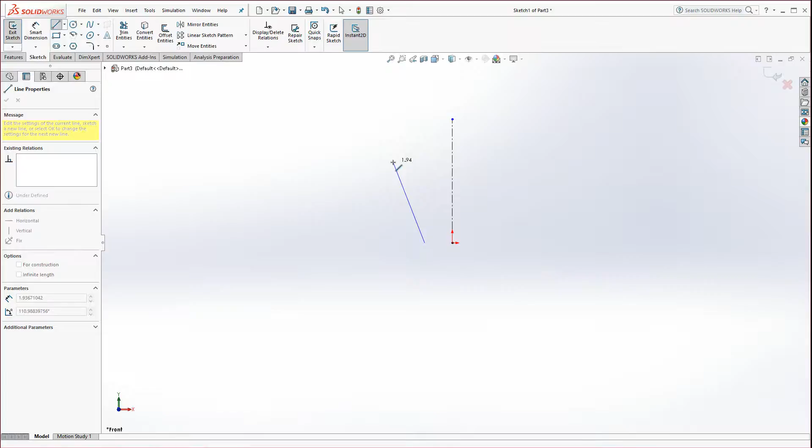Take the line tool and line yourself a distance away. Draw the angle in, just like you see here, maybe about 1.5 inches. Click, draw a horizontal line across there. Drag this down. Click, drag this across.

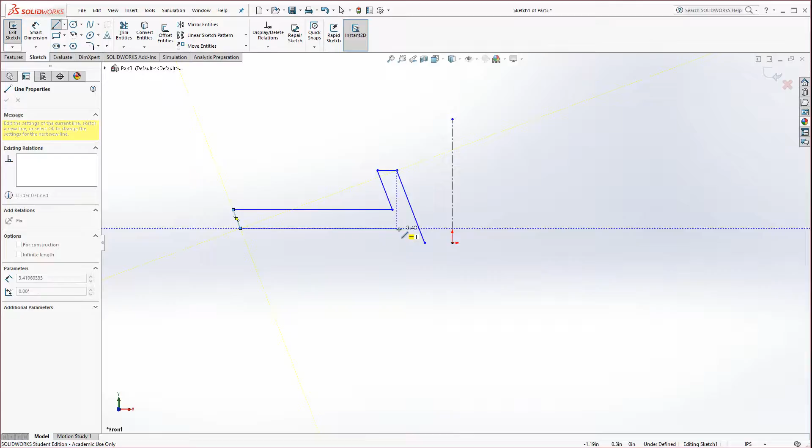Click, and look, you could actually follow right there is parallelism. That little symbol to the right of my pointer, a little in yellow, that's a parallel symbol, so it's going to make it parallel to those other lines. Drag this across, and again, I'll infer to that line there, and then we have our geometry.

Now it's just a matter of dimensioning it. Do not dimension like we have done in the past where we select these. Notice the actual print suggests parallel dimensions, so from here to here. Okay, and that needs to be 0.375.

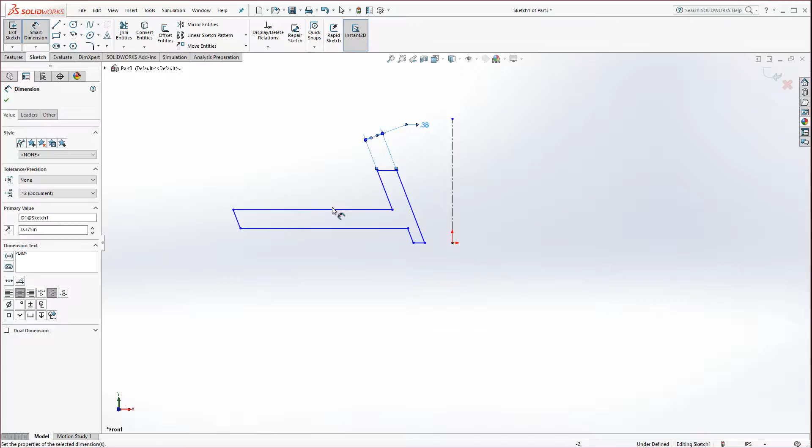And then from, I got that point again, darn it. Hit escape there. And then from here, and that needs to be set to 2.25.

Okay, and you might get something like this to happen. That's okay. Hit escape, grab this line, just drag it over. Now we could add some of the other dimensions.

So for, darn it, oh, these little points are very, just getting them today like crazy. So this is 0.25, I believe.

And then you just go through and essentially add all the other dimensions as it calls out in the print. And every time it starts doing this, you could go ahead and drag these things out.

And finally, this dimension from this point to the center line. And remember, if you drag it to the right of the center line, you get a diameter, which is supposed to be 1 inch.

Let's get a couple more dimensions in here. So 1.5 for the height. And 0.25 from the base, from here to here.

Let's see what else we have there. Oh, and the angle, 25 degrees. So from here to here, 25.

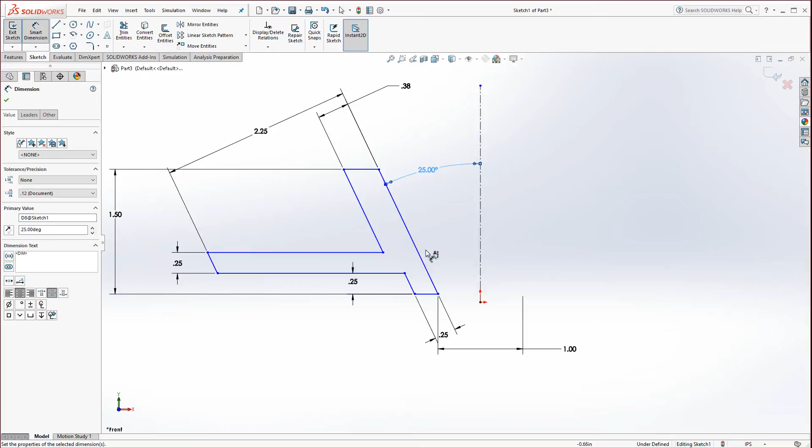And then finally, this last one, notice it's just floating there. Just click on this line one time to select it, and click on this point and make them coincident. And then it will turn black. It's fully defined. We are ready to go to Features, Revolve Boss Base.

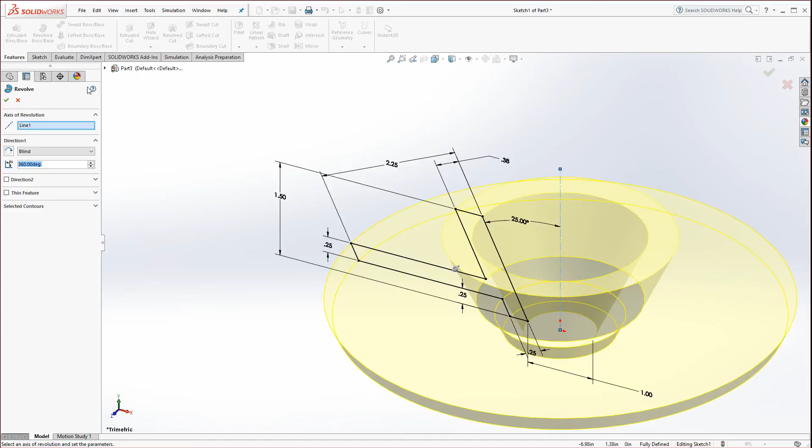Notice I didn't put the fillet in. Oops. Revolve Boss Base. And there we have it. Now you just go to the fillet tool, set it to 0.5, and select this edge. And you're done. And that concludes exercise 3.